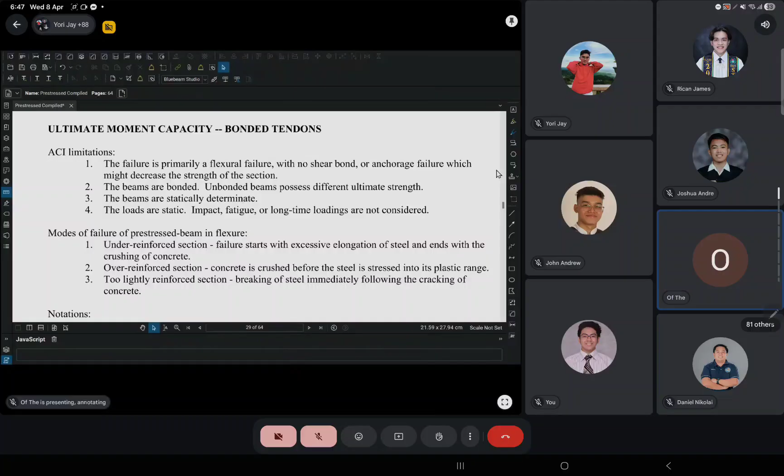Then third, you have also a too lightly reinforced section, when you have a very small amount of steel, where the strength of the steel is equal to the tensile strength of concrete or even lower. Then once the concrete cracks on the tension side, it will also be followed by the breaking of steel. So these three are the possible modes of failure.

Now in the subsequent formulas, these are the notations we will use. Just remember that when we have subscript P, it refers to the pre-stressing reinforcement. For simplicity, omega without the prime refers to the mild steel reinforcement, and with the prime symbol, it refers to the compression reinforcement. So for example, rho sub P is the steel ratio for pre-stress reinforcement, rho is the steel ratio for mild steel reinforcement, and rho prime is the steel ratio for mild compression reinforcement.

Similarly, you have your effective depth D, D prime, and D sub P, then area of the reinforcement APS, AS, and AS prime. Then for the strength of steel, you have FPS, which is the steel stress at ultimate moment capacity, computed using some empirical formula. And FPU, this is taken from the material property, the ultimate strength of the pre-stress reinforcement.

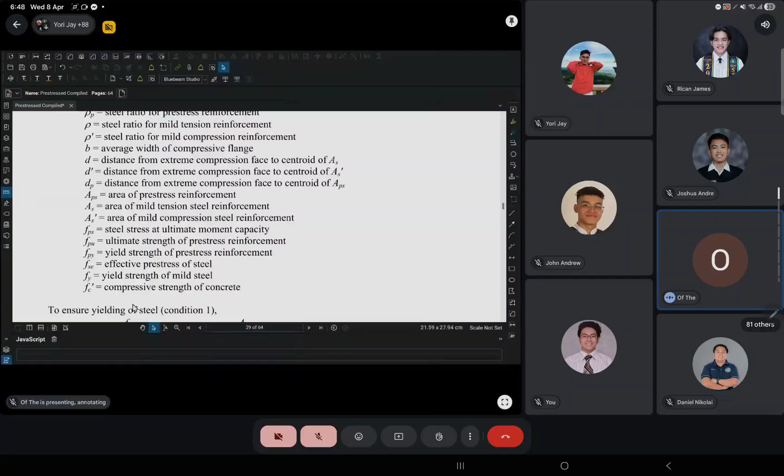Different types of cable are specified with different ultimate strength. Then FPY, that is the yield strength of the pre-stress reinforcement, then FSE, effective pre-stress of steel, and for mild steel, you have Fy. Then for concrete, you have F sub C prime. Now, between the three possible modes of failure, which one applies here?

Under-reinforced, over-reinforced, and too lightly reinforced - our preferred mode of failure is under-reinforced. So we want that if the section will fail, the failure should be initiated by elongation of steel rather than by crushing of concrete.

This is because crushing of concrete is a sudden, brittle kind of failure, whereas steel fails by yielding. It will exhibit excessive elongation first, resulting in widening and propagation of cracks toward the neutral axis, accompanied by increasingly large deflection, which gives a warning of impending collapse. Unlike failure due to crushing concrete, which is sudden with no warning.

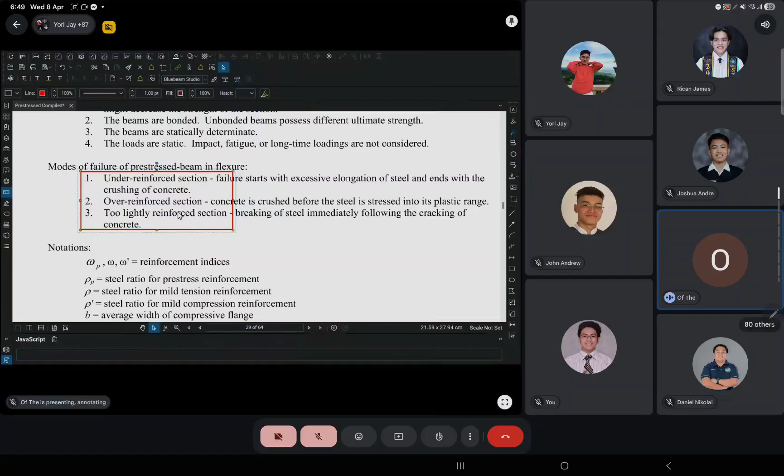That's why a well-designed or well-proportioned beam should be under-reinforced, not over-reinforced, and also not too lightly reinforced.

To ensure condition 1, that failure is initiated by yielding of steel, our reinforcement index omega P, which is equal to rho sub P times FPS over F sub C prime, should not exceed 0.36 beta 1. Where rho sub P is the steel reinforcement ratio for the pre-stress reinforcement, and beta 1 is a factor which depends on the strength of concrete.

If F sub C prime is less than or equal to 30 megapascal, beta 1 takes a constant value of 0.85. If greater than 30 megapascal, we have a straight line equation: 0.85 minus a reduction of 0.008 times the quantity F sub C prime minus 30, which represents the excess of the concrete strength beyond 30 megapascal. But in no case will beta 1 be less than 0.65.

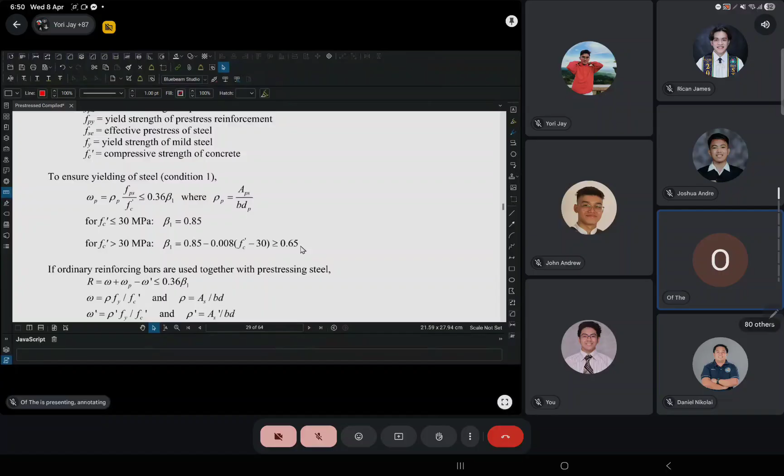Now, if ordinary reinforcing bars are used together with pre-stressing steel, for example you have your section, with the pre-stressing reinforcement here.

Oops. How will we pick this up? Okay.

In addition to that, usually we have mild steel bars placed at the corner in order to hold the stirrups in place, and also sometimes intentionally to reinforce the beam for tension if the tensile stress will exceed the tensile strength of concrete. So one way to address the problem is to provide mild steel reinforcement.

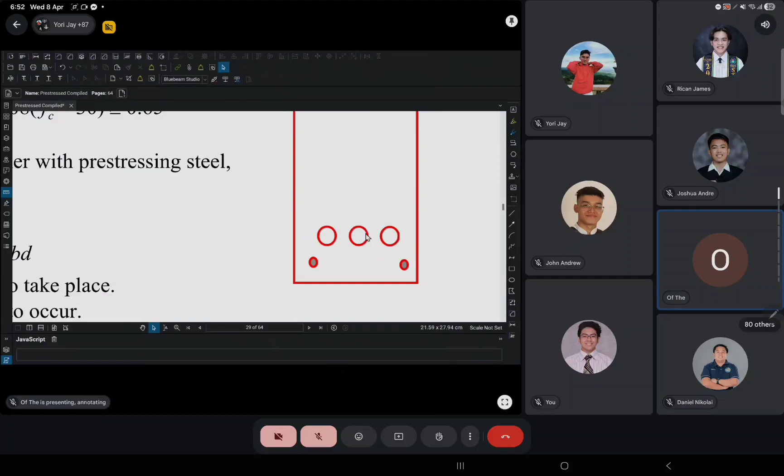And of course, we also have these compression bars here. They will serve to hold the stirrups in place, or again it could be intentional, that we add mild steel reinforcement on the compression side if the compressive stress will exceed the allowable compressive stress in concrete.

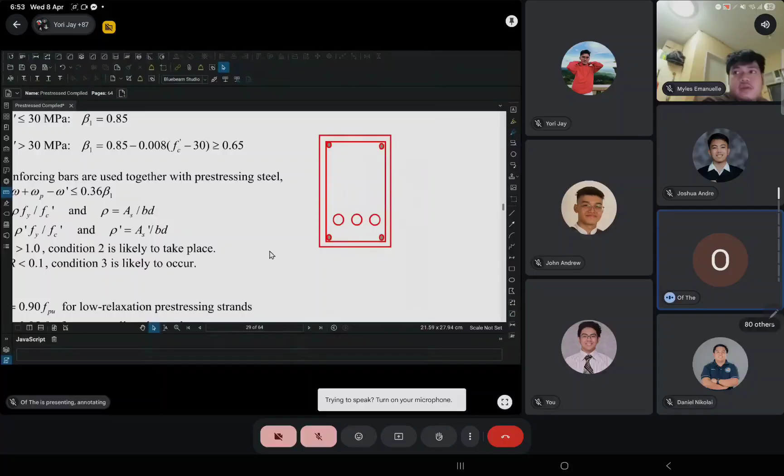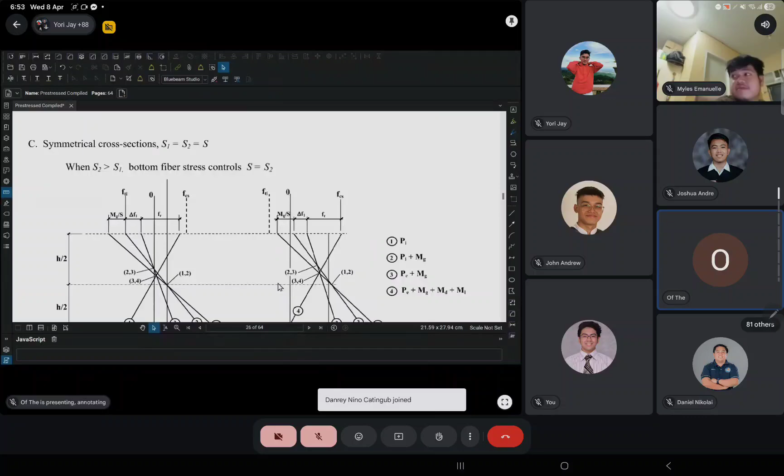So usually the procedure in designing these pre-stressed concrete beams is: first we proportion it based on service load condition as described, the procedure described in this chapter. Then once we have the initial size and reinforcement, calculated based on service load condition, we just check its ultimate moment capacity.

So if it's lacking on the tension side, we just add mild steel reinforcement rather than revise the size of the beam or the amount of pre-stressing reinforcement. This is usually what's done - we just add mild steel reinforcement.

So if these mild steel reinforcing bars are present, our reinforcement index will be modified. To omega sub P, we add omega, which is for the tension bars, then minus omega prime for the compression bars. So instead of simply omega P not exceeding 0.36 beta 1, omega P is added with omega or subtracted by omega prime. Then the sum should not exceed 0.36 beta 1.

So our omega is rho Fy over F sub C prime, omega prime is rho prime Fy over F sub C prime, where rho and rho prime are the steel reinforcement ratios for mild steel tension or compression reinforcement respectively.

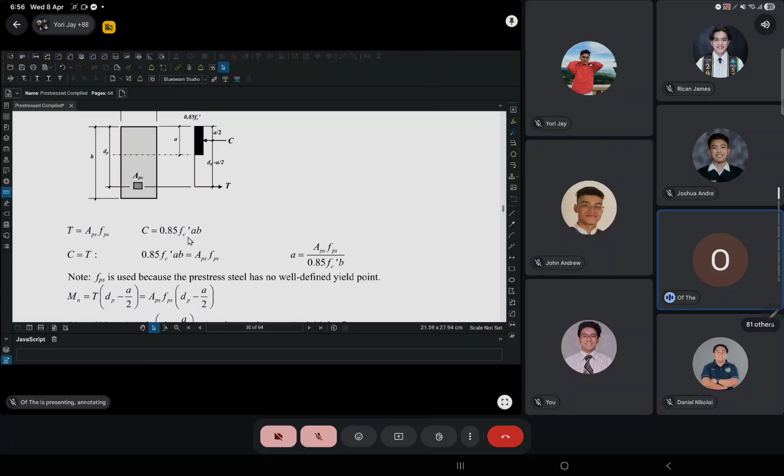So the total tensile force is equal to APS multiplied by FPS. Then the total compressive force will be the average concrete strength, 0.85 F sub C prime, multiplied by the area over which the stress block will act, which is equal to B multiplied by A. Then internal equilibrium requires that C will be equal to T. So if we equate and solve this equation for A, we get this result.

So there's a note here. FPS is used because pre-stressing steel, unlike mild steel reinforcement which has a well-defined yield point, pre-stressing steel does not have a well-defined yield point. That is why FPS is computed using some empirical formulas.

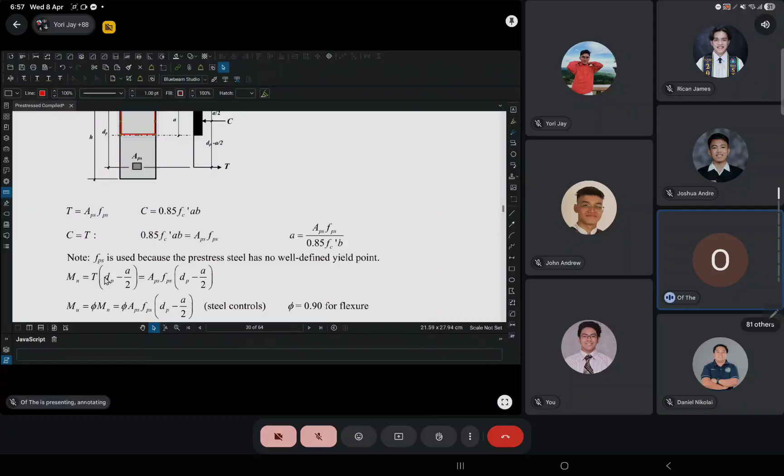So once we have computed the depth of the stress block, then we can determine the moment arm of the internal couple, which would be dP minus A over 2, and we can compute the internal moment. Since we know the force, either T or C, multiplied by the internal moment arm, dP minus A over 2, that will give you your moment capacity.

So if this is under-reinforced, then the moment capacity will be governed by the allowable tension in steel. So the problem now is how do we compute this FPS.

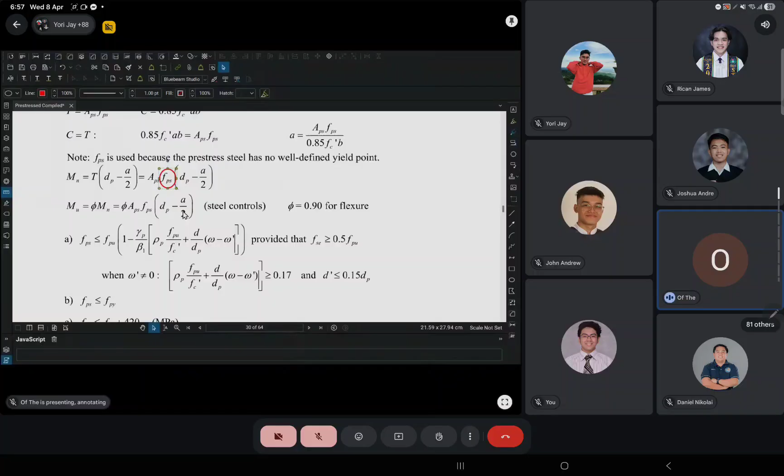So the code gives us 3 formulas for computing FPS. This is for bonded tendons. So we have the first formula, which includes a lot of factors here. Then second, FPS not to exceed FPY, and FPS not to exceed the effective pre-stress plus 420. And this is empirical, so your stresses here should be in megapascal.

And in this formula, gamma sub P is a factor for the type of pre-stress tendon. So if FPY, the ratio FPY over FPU, exceeds 0.8, you have a value of 0.55 for gamma P. And if greater than 0.85, it decreases to 0.4. And if greater than 0.9, it decreases further to 0.28.

Now in an over-reinforced bonded beam, the moment capacity is governed by the strength of concrete. So that's why here, instead of using T, we use C.

So the same, we still consider the internal equilibrium. We equate, then solve for the depth of the stress block, then replace APS by rho sub P BDP, then cancel out the common terms. So you will get this reduced expression for A, which is 0.424 beta 1 times dP. So once you have solved for A, then you can compute the internal resisting moment capacity.

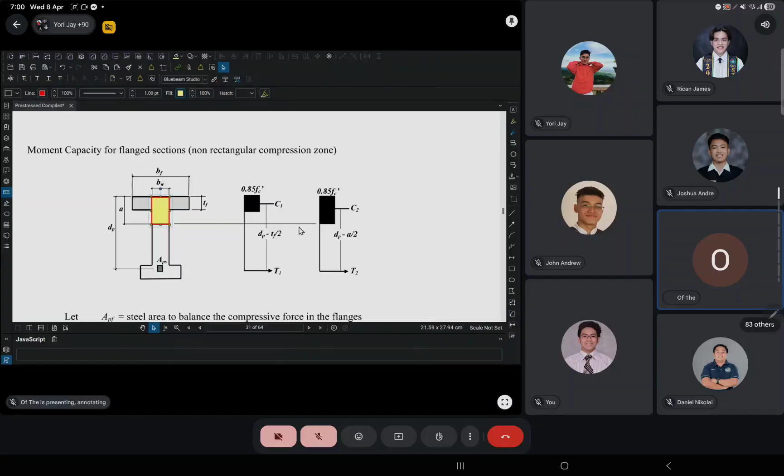So to analyze this, we just divide this area into component rectangles. So the middle part, that is one internal couple. Then for the concrete corresponding to the flanges, that is another internal couple. So we are using here superposition. Then of course the total moment capacity will simply be the sum of this couple and this internal couple.

So it's just the same as a T-beam analysis in reinforced concrete. So again, you are already familiar, it follows the same line of analysis. So starting with this couple here.

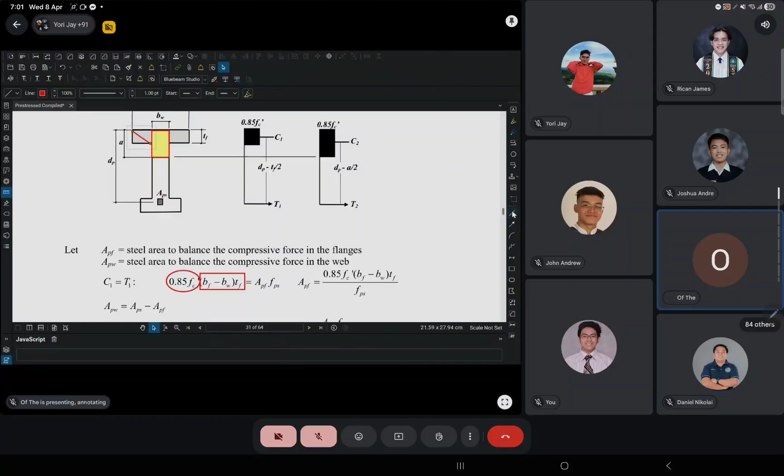So again, equilibrium requires that C1 is equal to T1, and C1 will be equal to the average concrete strength or stress, 0.85 F sub C prime, multiplied by the area. So the area will be this area at the side, this area here, also at the other side. So the net width will be BF minus BW, flange width minus the width of the web, then multiplied by the thickness of the flange.

And that is equal to the area of steel that is required to balance the compressive force C1. So we call that APF, where the subscript F refers to the flange, compression force in the flange. So the corresponding area of steel to balance it, we call APF, multiplied by FPS. So from this equation we can solve for APF.

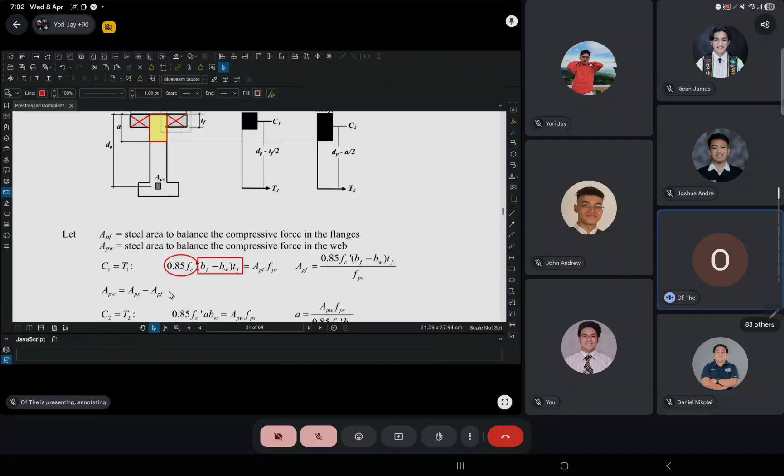So nakuha nato ang APF diri, so pila may mahibilin para sa kaning nga couple. So it will be APS, the total area of pre-stress reinforcement, minus the area used up in this couple here. So muna ang APW, so this is for the web, to balance the compressive force in the web.

So kaning middle portion, atong equate ang C2 to T2. So C2 will be 0.85 F sub C prime ABW and T2 APW FPS. Then solving for A, we get this value.

So once we have solved for the depth of the stress block, before you can compute the moment, you have to know the value of A. So this is how we arrive at the value of A. So once that is known, then we can now evaluate the moment of this couple here and this couple.

So for the first part, you have the compressive force is this value, 0.85 F sub C prime BF minus BW TF. Then the moment arm will be dP minus TF over 2. Then for the second couple, so ang atong

Force will be APW FPS. So solving it in terms of the tensile stress in steel, so APW FPS. So diri pwede sad nga mo-ingon APF times FPS, instead of this. Anyway, based from this equation, they are equal.

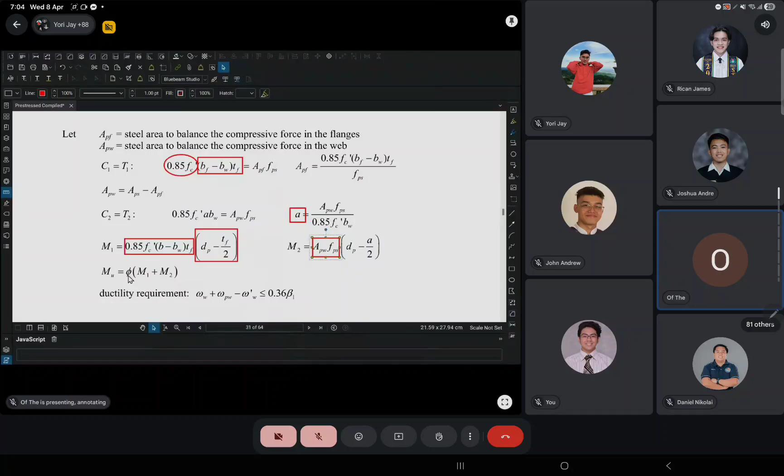And the ultimate moment capacity will be equal to the sum of these nominal capacities then multiplied by the strength reduction factor, phi. So for bending, phi is equal to 0.9.

So ang ductility requirement, we have omega sub W. So kaning subscript na W, nagpasabot nga kay mag-compute kag rho, mag-compute kag rho mo. So, ngari, atay calculation sa rho, di ba?

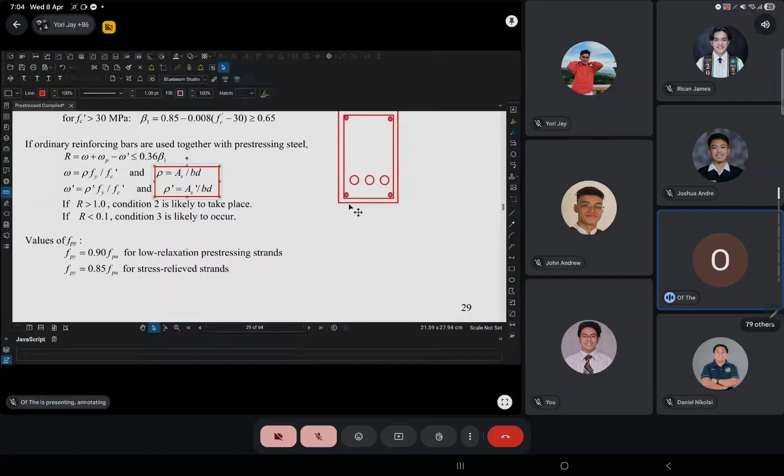But in case of an irregular section or non-rectangular section, kung unsa nga B ang imong gamiton, ang B is sa flange ba o ang B sa web? So, the subscript W will serve to remind us that we use BW, the width of the web, and not the width of the flange. So kani siya nga mga index is computed based on BW.

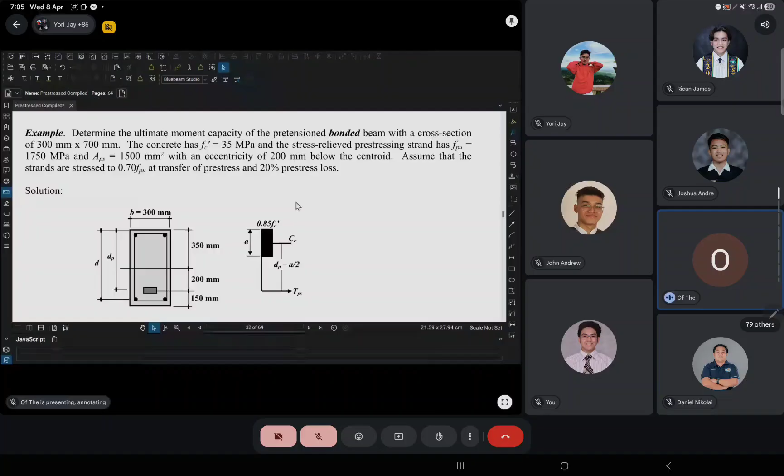So what follows is a sample problem. Determine the ultimate moment capacity of a pre-tensioned bonded beam with a cross-section of 300 by 700. Concrete has strength of 35 megapascal and stress relieved pre-stressing strand has a FPU of 1750 megapascal, APS 1500, and eccentricity of 200 mm below the centroid. So assume that strands are stressed to 0.7 FPU, at transfer of pre-stress and 20% pre-stress loss.

So monitoring atong cross-section, sa atong pag-una nga computation nga gihimo niini, so probably the section was already proportioned based on service load condition. And we are now checking sa iyang ultimate moment capacity.

So at this stage sa atong computation, naa na tay beam dimension, naa na tay area sa atong pre-stress reinforcement, unya nahibaw-an na ang iyang eccentricity. Okay?

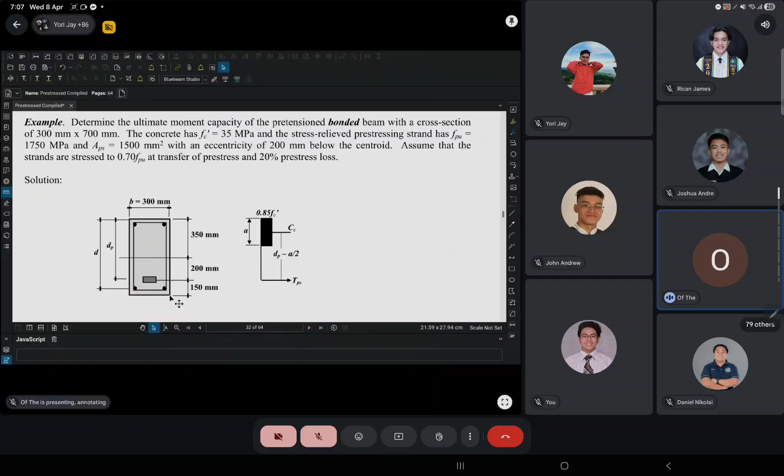So kining solution, although as you can see in the figure nga naay mild steel nga compression bars, kanito rin nay mild steel nga tension bars. But in our calculation, we neglect the effect of the mild steel reinforcement. So wala na siya mo-enter diri sa atong computation.

Now, in case if the beam is intentionally reinforced with mild steel reinforcement to increase the ultimate moment capacity, so kung i-consider nimo ang effect or contribution sa compression bar, then you will have here the compressive force taken up by the bars on the compression side, in addition to this one, sa atong tension diri or tensile force sa imong mild steel reinforcement.

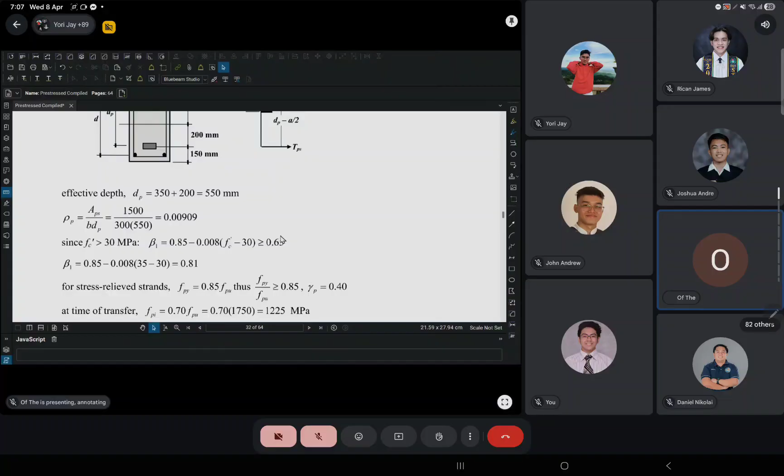However, in this calculation, we did not consider the effect sa compression or tension reinforcement. So from the figure, bitbit-on na atong figure, so the effective depth, that is the distance from the extreme compression fiber to the centroid of the reinforcement, that would be the sum 350 plus 200, which gives 550.

And next we solve for rho sub P, which is APS divided by BDP. So naa tay APS, naa tay B, naa tay DP. So masolve na ang rho P.

Then next we compute beta, or beta sub 1. So since our F sub C prime is greater than 30, then we use this formula. If less than or equal to 30, then it is automatically 0.85. So substituting F sub C prime 35 megapascal, we get beta 1 of 0.81.

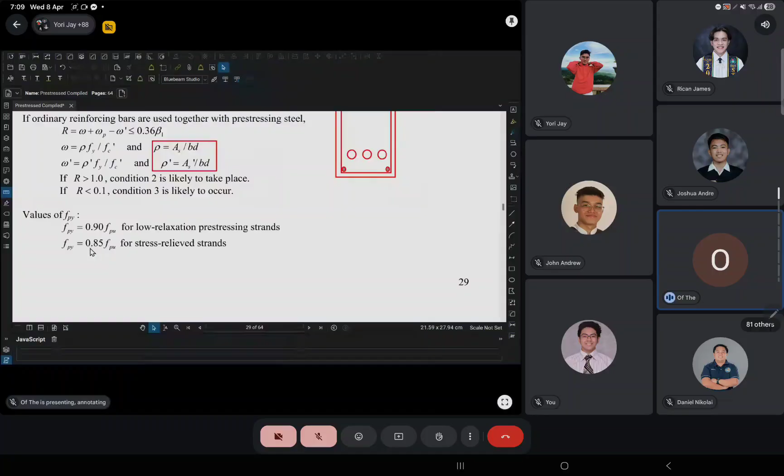Then next we compute FPY, which is for stress relieved strands. So gikan diri nga table, ganito, for using this formula, stress relieved strands, our FPY is 0.85 FPU. And if you get the ratio, so it will be, you will get an equivalent value for gamma sub P equal to 0.4. So mao na siya diri ang atong gibasihan.

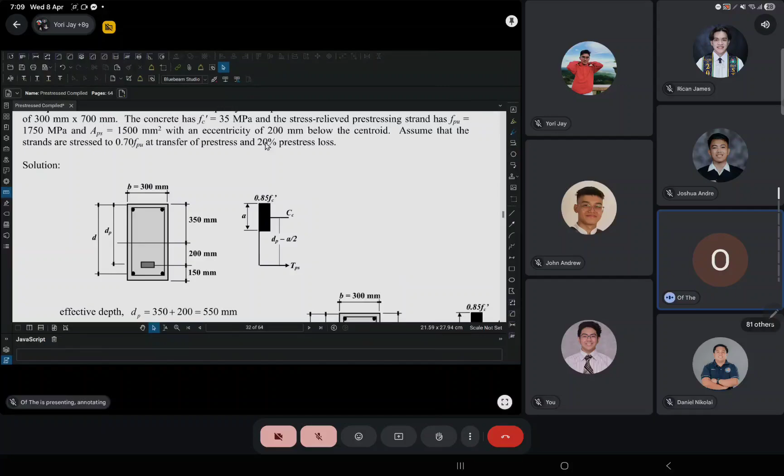So gamma P equals 0.4, and the time transfer FPI is 0.7 of FPU. Based on this condition, the strands are stressed to 0.7 FPU at transfer of pre-stress. Then FSE, considering a 20% pre-stress loss assumed in the problem, gives us an effective pre-stress of 980 megapascal.

So the next part will be to determine FPS using three equations, A, B, and C. First, we have to verify this specified condition.

We need to verify this because the formula is valid subject to this condition. Before applying the formula, we check if FSE is greater than or equal to 0.5 FPU. Our FSE is 980, and half of FPU is 875. So the condition is true, and therefore this formula will apply.

Now, neglecting the effect of the tension or compression mild steel reinforcement, we set those to zero. The remaining term cancels out, leaving only one term. Substituting values, we arrive at FPS equals 1357 megapascal.

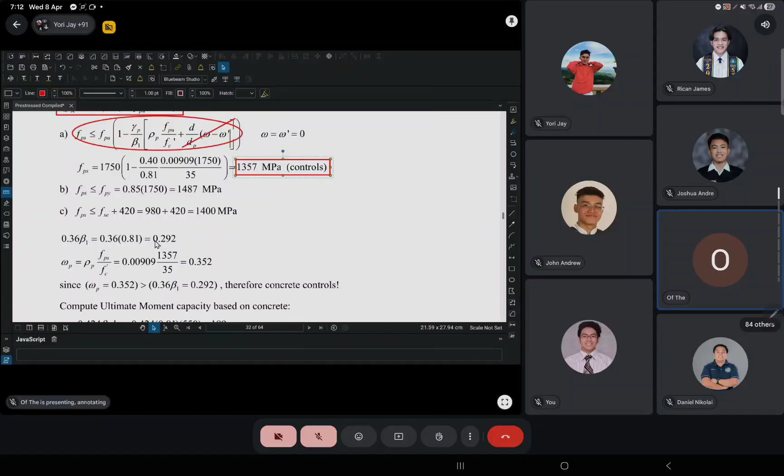Next we check whether tension or compression will govern. Our limit is 0.36 beta 1, which gives 0.292, and we compute omega p using the formula rho sub p times fps over f sub c prime. These values are given. Then rho sub p is computed as 0.00909, and we get omega p equals 0.352. We compare this omega sub p to 0.36 beta 1.

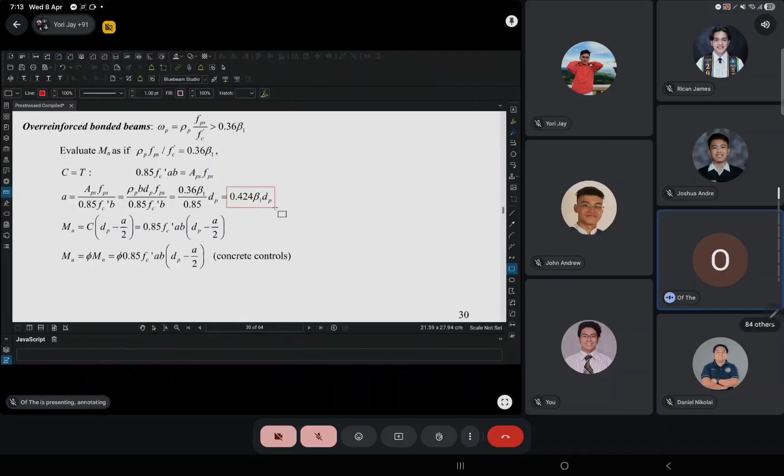So once you have A, you can compute your moment capacity, expressed in terms of the compressive force C: 0.85 F sub C prime, with A computed, B given, then dP computed based on the section dimension. So we compute MU. Substituting values, you get 691.5 kilonewton meter.

Up to this part, the solution is already complete, since we know this condition is prevailing, so concrete will govern. But just to verify, let's also compute the ultimate moment capacity based on steel.

So we compute the depth of the stress block if that is the case, by equating the compressive force to the tensile force. Full tension in steel, APS times FPS, equals the balancing compressive force in concrete, which adjusts this A. So A is computed and we get 228.

Then we use the equation APS FPS, that is T, times the moment arm, the internal couple, multiplied by the capacity reduction factor. Substituting values, we get an answer of 798.73 kilonewton meter, which when compared with the previously obtained result of 691, the lower value governs the moment capacity, since steel is larger than this value, as we should expect.

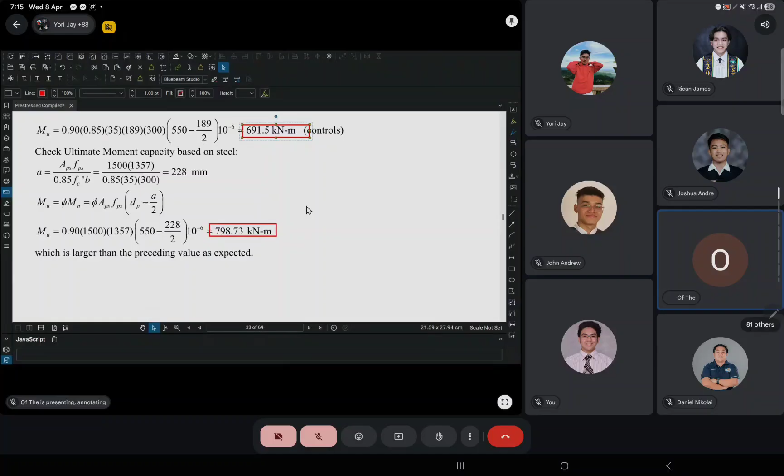So that's for the bonded tendon. Now we move to unbonded tendon. For unbonded tendon, the pre-stressing force is transferred at the end of the beam through bearing plates, since there is no bond stress between the reinforcement and the concrete. The pre-stressing force is transferred only at the ends of the cable, using bearing plates.

For unbonded tendon, the ultimate strengths are actually lower than for the equivalent bonded ones, and there are two reasons given here. First, the tendon is free to slip, so the strain in the tendon is more or less equalized along its length, and the strain at the critical section is lessened. Unlike in the bonded case, where the strain in the tendon corresponds to the magnitude of the bending moment, so at the section of larger bending moment, you have a larger strain.

But in unbonded tendons, they are free to slip since they are not gripped by the concrete, so the strain is distributed throughout the length of the cable.

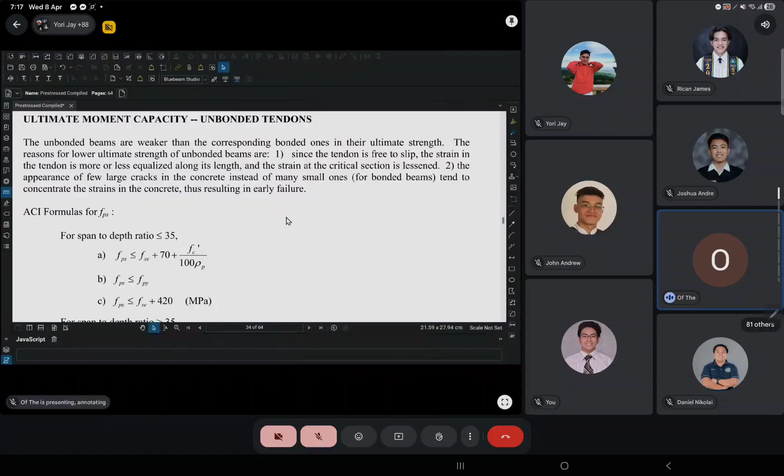Then second, the appearance of few large cracks in the concrete instead of many small ones for bonded beams. This tends to concentrate the strain in the concrete, thus resulting in early failure. That is why for unbonded tendons, to avoid this situation, the code requires that we provide a minimum amount of bonded reinforcement, to avoid the occurrence of large cracks.

In terms of calculation, the difference here is in computing FPS. For bonded tendons we have the formulas for FPS, and for unbonded, we have a separate set of formulas. FPS depends on the span to depth ratio. If it is less than or equal to 35, we use this set of equations. If greater than 35, we use another set of equations. So to determine which set to use, we have to verify the range of our span to depth ratio.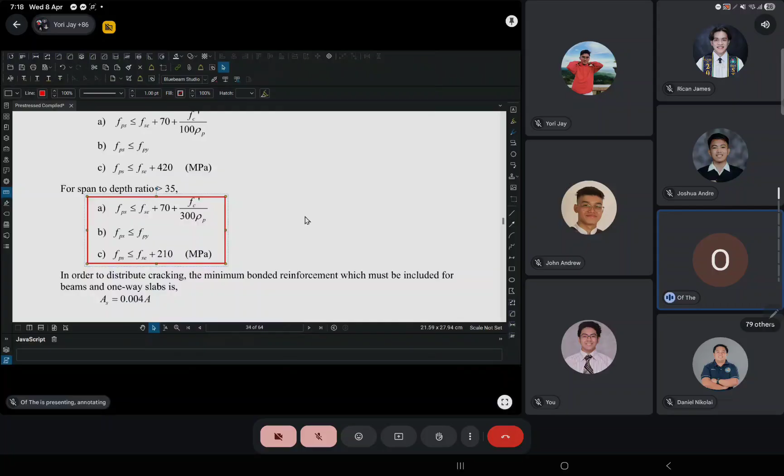So in order to distribute cracking, the minimum bonded reinforcement which must be included for beams and one-way slabs is 0.004 of A. Now that A is the area in tension. For example, for this cross-section, if it is rectangular, then our neutral axis will fall at mid-depth, unless you follow a more detailed calculation.

Because there is a reduction in concrete area here, since this is where you place your prestressing reinforcement, and that will somewhat reduce the concrete area here and therefore move the neutral axis towards the top, or higher. But anyway, neglecting that, our tension area is this area here—that is the A.

So the area of that part of the cross-section between the flexural tension face. In case of positive bending moment, your flexural tension face will be at the bottom, and the centroid of the cross-section—so the steel which supplies AS should have a yield stress not exceeding 414 megapascals.

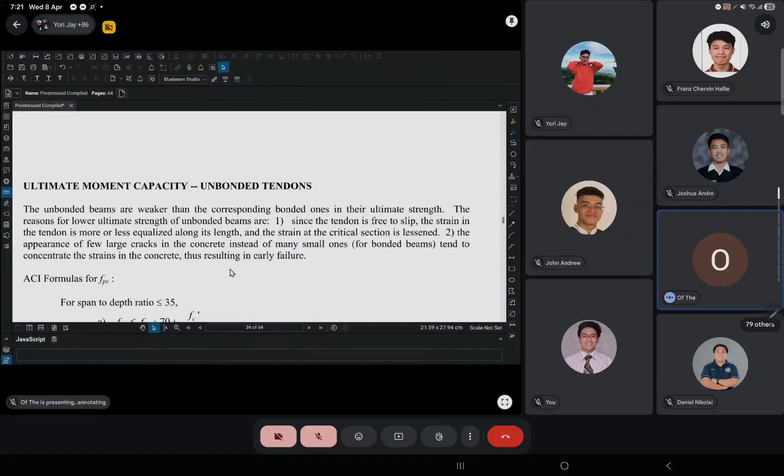So for dp, here we have the span to depth ratio. The span is 12 meters divided by the depth, which is the overall depth of the section—so 700. We get 17.1, which is less than 35. So since it's less than 35, this set of equations for solving FPS will be applied.

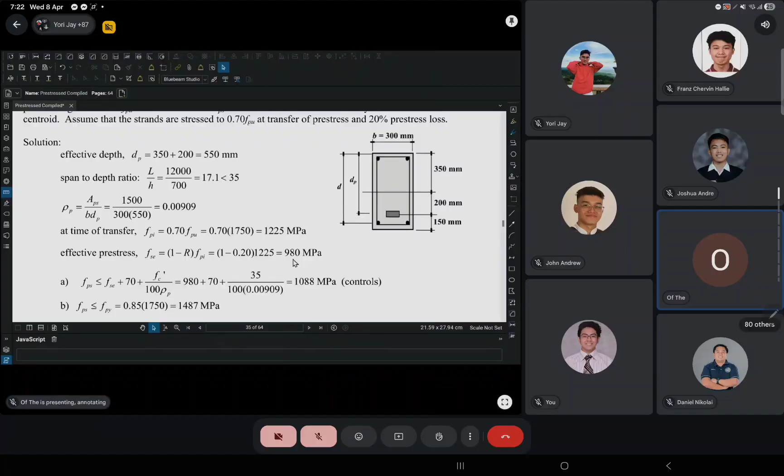So next, we solve for rho sub P, similar to before. Then at time of transfer, 0.7 FPU gives effective prestress of 980. Now for our equations, we use these three. Substituting the values, we get these results, and we adopt the smallest of the three answers. In this case, we have 1088 megapascals.

Then for minimum bonded reinforcement, we have 0.004 of A, where A is the area between the neutral axis and the tension face, which is effectively half of the cross-sectional area of the beam. So we get a required area of 420.

Then we select the bar diameter and compute the area of the bar and the number of bars. So we got 2.1, we round off to 3 pieces of 16 mm diameter bars.

Then for the limiting value, whether it is under-reinforced or over-reinforced, we compute 0.36 beta 1, where beta 1 is 0.81, the same as we calculated in the previous sample. So we get 0.292. Then we compute the reinforcement index for the prestress reinforcement.

Then this is now for the mild steel reinforcement. In this analysis, we are considering the mild steel reinforcement—the contribution of the mild steel reinforcement. Now, effective depth for the mild steel reinforcement.

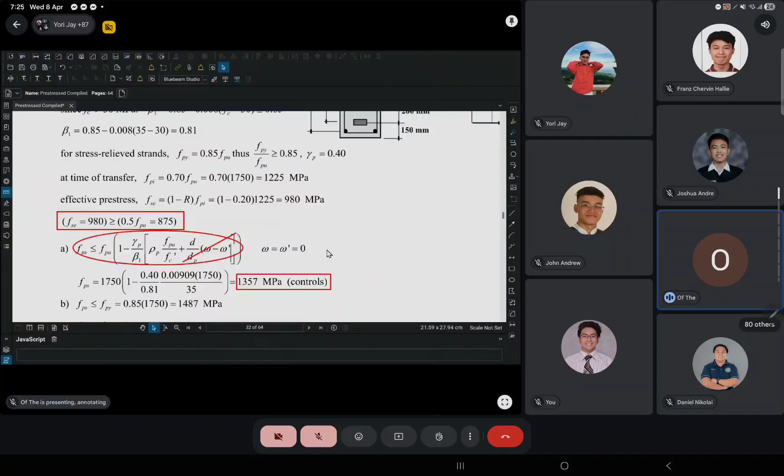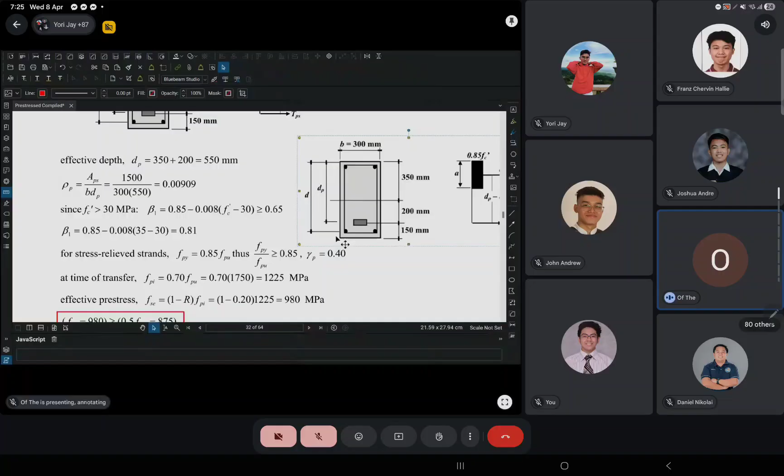Now, in this example, so both in the previous example and sa kaning example karon, ang concrete mo may govern sa iyang moment capacity, which again from a design standpoint is not desirable. So ang ato gyud untang buhaton sa actual nga design kay ang steel mo may govern sa strength. Atong pwede dungangan atong compression bars, no, to reinforce. We provide enough nga compression steel so that the failure will now be initiated by yielding on the tension side. Pero dire wa na ta mo padayon diha, kay ang atong tuyo pag-compute naman sa moment capacity. Pero mag-design ta sa actual design practice, ato na siyang i-address nga problem. Kaya dili ta gusto nga mo fail ang atong beam first by compression nga failure.

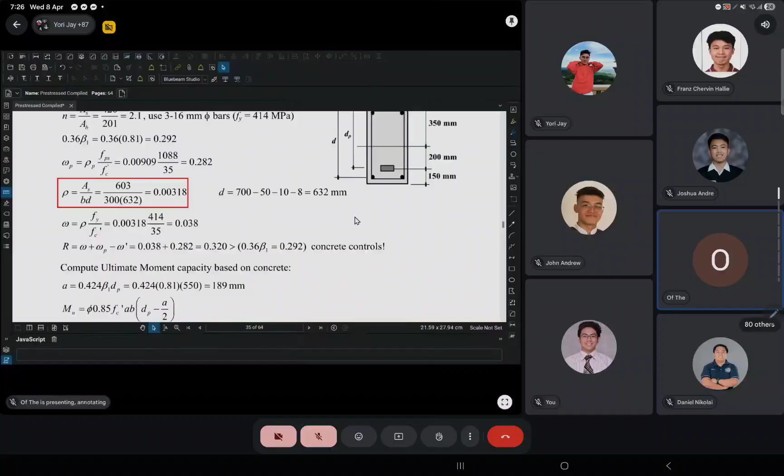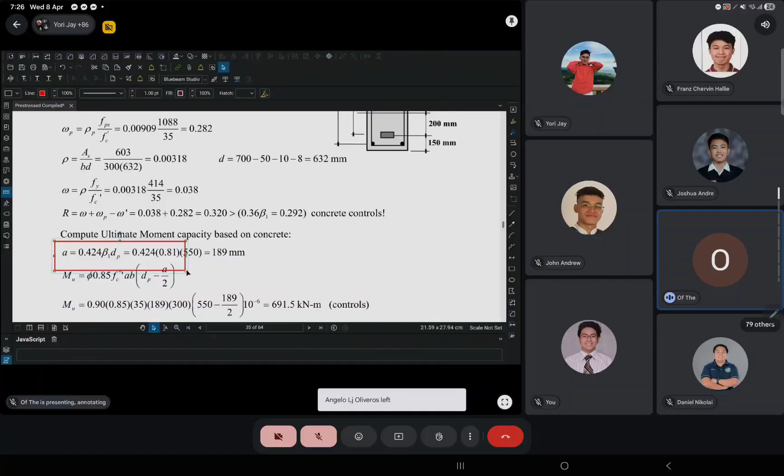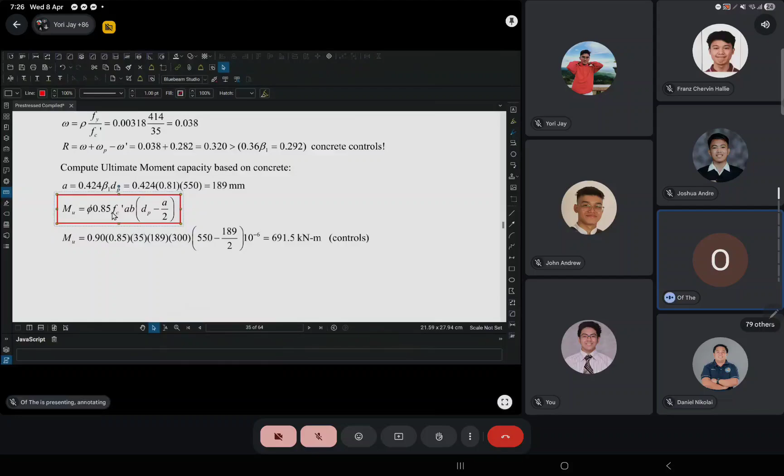Okay, so if compression control, so you have this formula for determining the depth of the compression block, then MU is computed based on the concrete strength. So 0.85 fc prime AB, that is the compressive force, kani siya. Then dP minus A over 2, the moment arm, then phi the reduction factor. So if you substitute the values, you get an answer of 691.5 kilonewton meter.

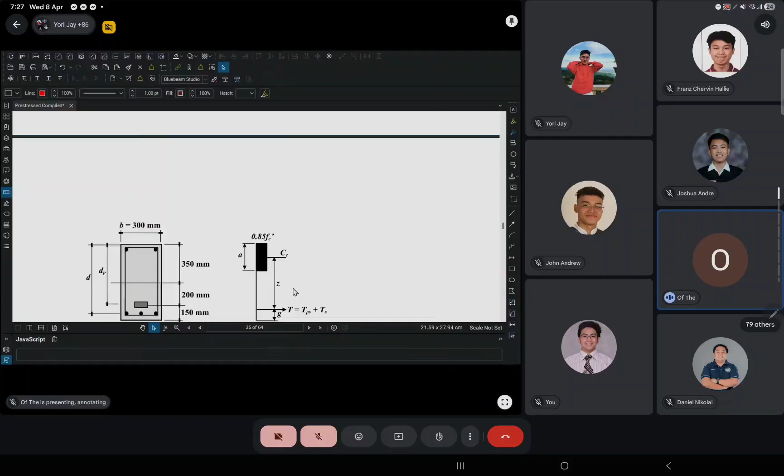Now, so again, up to this part, the solution is already complete, since this condition prevails, kani siya, and we are sure that the moment capacity is governed by concrete. But still, pareha sa ganiha, ni padayon lang gyapon tag compute. Ato lang gi-check ang moment capacity based on steel.

So karon ang atong sa steel nga side, naanay siya duha ka component. Naatay pre-stress reinforcement nya tulo ka 16 mm diameter bar. So unsa may atong buhaton ini, ato lang ni siyang gi-replace, nakay tension diri sa imong pre-stress reinforcement, nasa kay tension sa imong mild steel reinforcement. Then we replace that by a single or by the resultant, kaning T, which is a sum of TPS plus TS.

So TPS will be FPS times APS, then TS is FY times AS. So again, remember nga natay subscript nga P to denote sa atong pre-stressing steel. So we get these answers, then we take the sum, then locate the centroid. So mo man siyang resultant ining duha ka mga forces. So ato na compute ang magnitude, karon atong solbuhan asa man ang iyang location.

So we locate it from the bottom. So you have kani nga force ato na compute nga 1632. Then kaning sunod, kaning TS ato na compute nga 250. So pila may distance na to from the bottom to, so pila man nga distance? Yeah, so that would be 50 the concrete cover plus 10 mm stirrup diameter plus half bar diameter. So 50 plus 10 plus 8, that would be 68.

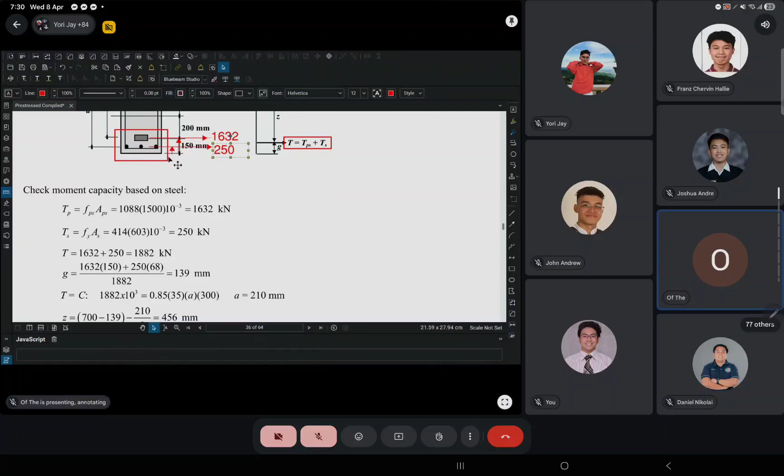So manini ang sunod na tong kuan, ang pag-compute na to sa depth sa atong compression block, assuming that steel will reach their corresponding limits. So ato na equate ang total nga tensile force ngadto sa total nga compressive force. So 1882, then 0.85 f'c a b.

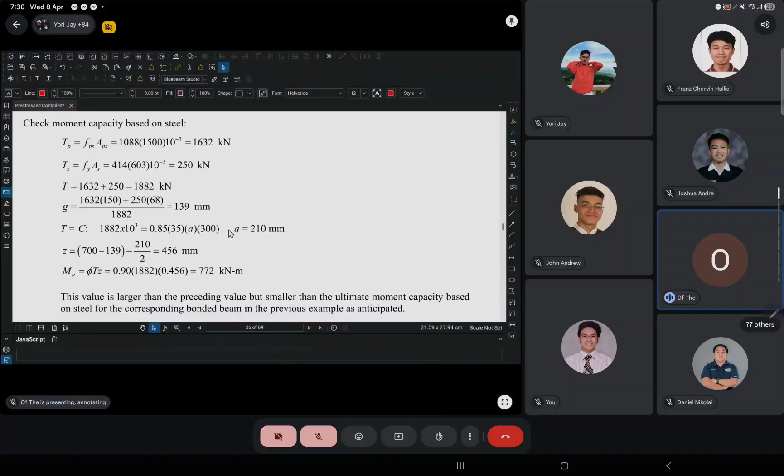So ang anong diri ang area. So once we have solved for A, then we can compute the kining moment arm internal couple, which is Z. So Z will be dP minus A over 2. Ano? Rather, Z will be equal to H minus G minus A over 2. Okay? Another ang atong computation.

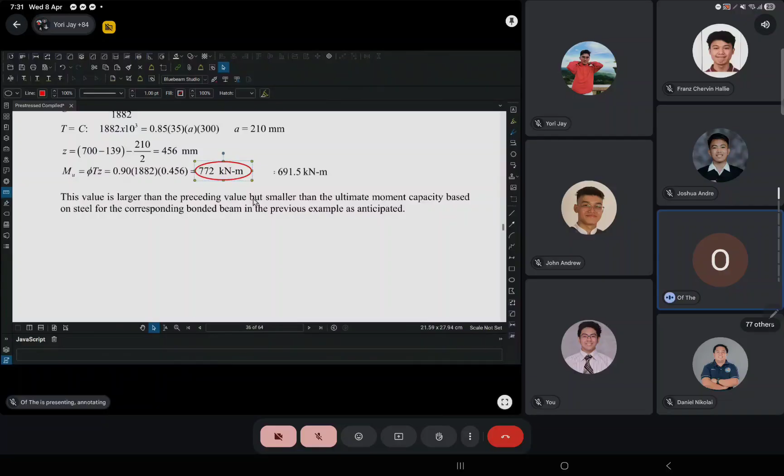Then once that moment arm is determined, then you can compute the internal resisting moment, in terms of the tensile force, so T times the moment arm Z, then multiplied by the capacity reduction factor. So we get 772. Then if we compare that with this answer, which is 691, so as expected, the capacity based on steel strength is larger compared to that of moment or concrete strength, because this condition prevails.

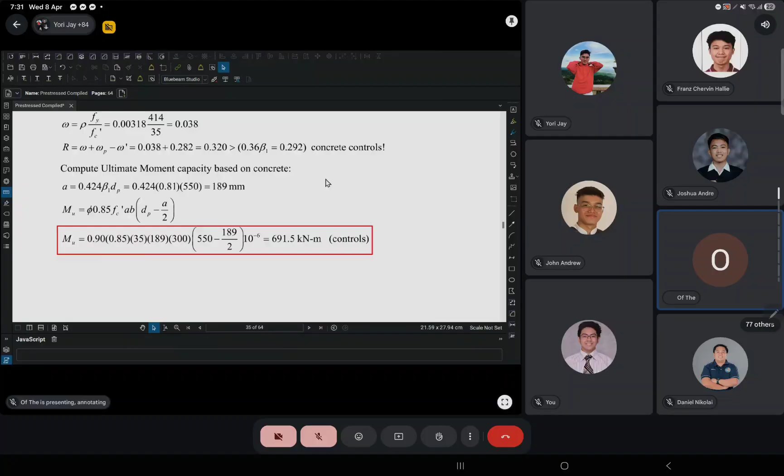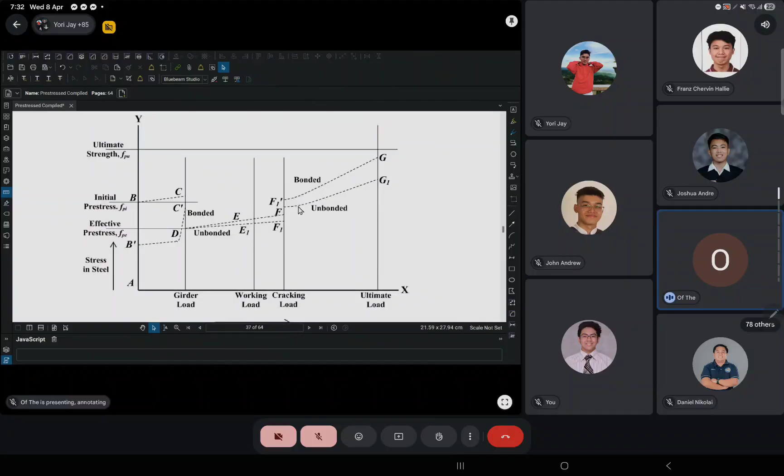This graph shows the variation of stress in the steel, both for bonded and unbonded beams. Let's trace the path for the unbonded beam first, as the load is progressively increased, from girder self-weight, then superimposed dead and live load, then the cracking load, which is the load that will initiate cracks on the tension side, then finally the ultimate load.

So as the load on the beam is increased, the stresses still increase. This shows the variation for the unbonded beam, so it goes here, then there, then up to this point.

For the bonded beam, there is a slight decrease here, then it goes here, and at the cracking load it will abruptly absorb additional force, suddenly jumping. As you further increase the load, the stress increases further.

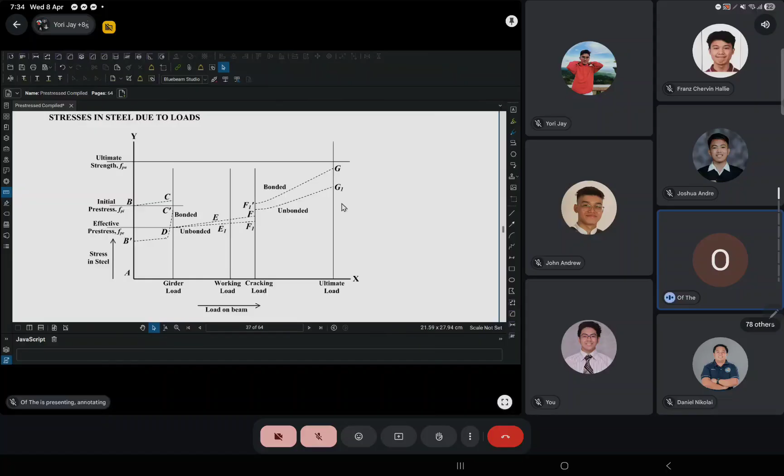So we can see that the bonded beam, because it carries a larger stress, will have a larger moment capacity. So, any questions?

So you already received the plates? These plate problems, numbers 4 to 7.

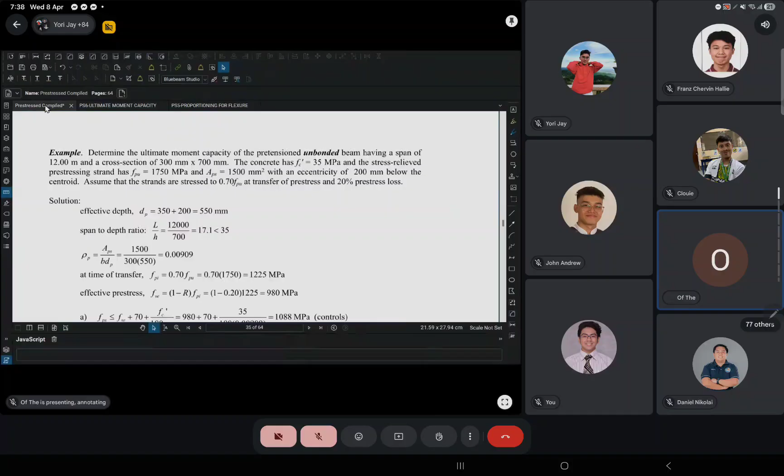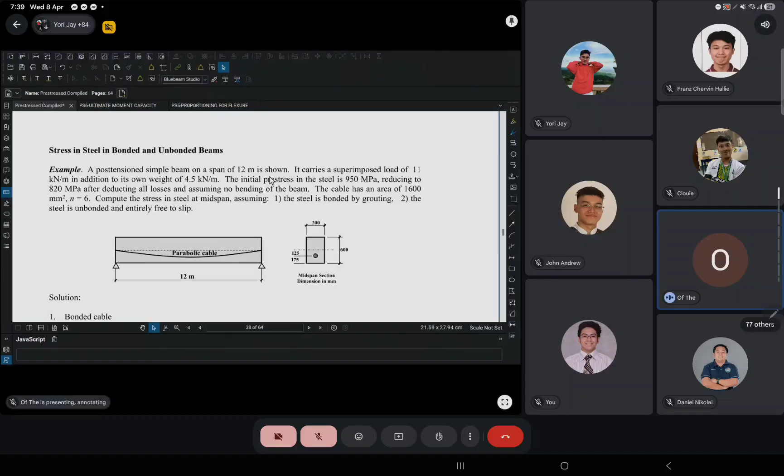Sometimes it is necessary or required to compute the stress in the steel. Although this is rare, there are occasions when it's needed, for example in investigation problems where loading is given and you want to determine the stress in the steel.

In this example, we'll illustrate the method of computation both for bonded and unbonded beams. Same beam, but in part 1 we assume the steel is bonded, then in part 2 we assume the steel is unbonded. A post-tensioned simple beam on a span of 12 meters is shown, carrying a superimposed load of 11 kilonewton per meter in addition to its own weight of 4.5 kilonewton per meter.

Later, when we arrive at the topic of prestress loss, when the prestressing force is applied, the beam will tend to bow up, tend to bend upward, thereby resulting in a loss of prestress, since the fiber at the level of the steel reinforcement will slightly contract due to compression. We neglect that effect here.

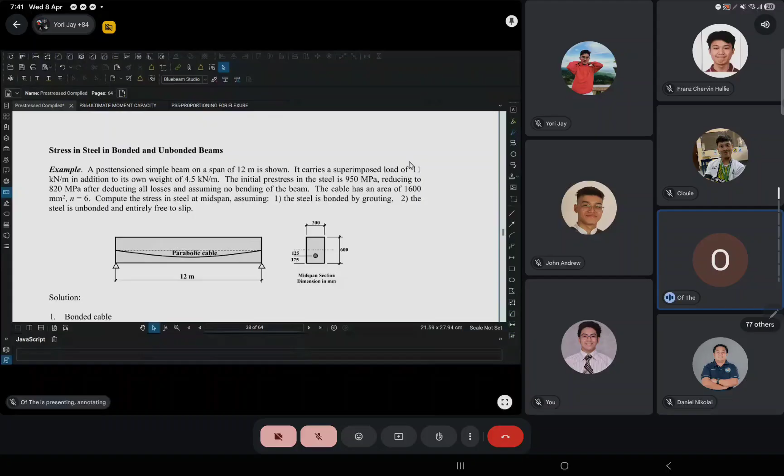Here we have the superimposed load of 11 and the weight of 4.5, so this combines the dead load and the superimposed load. Since it is simply supported, we use WL squared over 8, and we get 279 kilonewton-meter.

Then we calculate the moment at midspan due to prestress, which is APS times FSE multiplied by the eccentricity e.

APS is 1,600 square millimeter, FSE given to be 820, eccentricity from the figure is 125, then we multiply by 10 to the minus 6 to convert Newton-millimeter to kilonewton-meter.

Then we compute the net moment at midspan, which is the moment due to applied load minus the moment due to prestress.

Now, in this calculation, what concept of prestress are we using here? There are three, right? Homogeneous beam concept, internal force method, or load balancing.

So which one is this? What method is it? My fellow students, which one is this - homogeneous beam method, internal force method, or load balancing method?

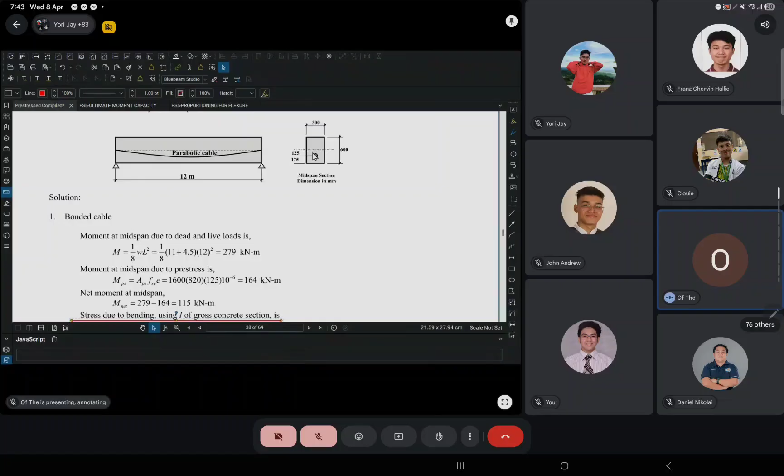Our M is 115, that net moment, and y is the distance from the neutral axis to the level of the steel reinforcement, which is 125. So this gives the stress in concrete, 2.66 megapascal.

Then the corresponding stress in steel, we multiply by the modular ratio N. So N times FC is 16, and this is the change in stress in the steel.

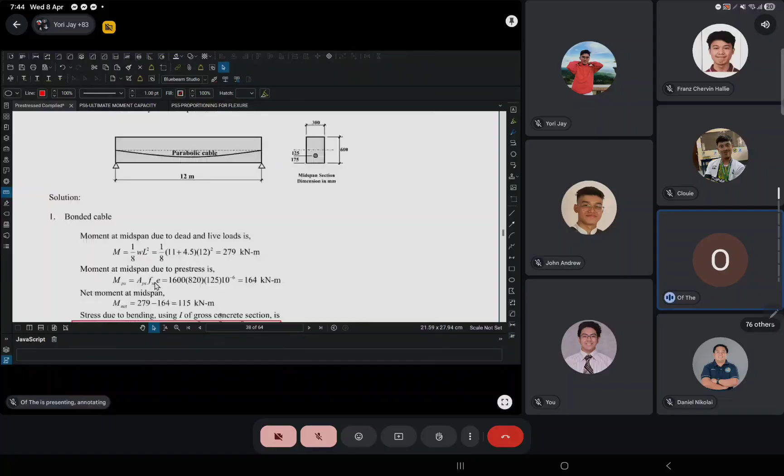Then we add it back to the effective prestress of 820 megapascal, giving us the final or resultant stress in the steel.

Now, in the second case for the unbonded cable, the solution requires integration. The average strain in the cable is computed by integrating the strain along the entire length, starting with the unit strain in concrete at any point.

This strain is given the symbol gamma. Don't be confused - this gamma represents strain.

Some textbooks use the symbol E for strain instead. So this strain is equal to the stress divided by the modulus of elasticity.

But stress by the flexure formula is My over I, so this My over I becomes our F.

So we get that result of My over E sub Ci, where our E is the modulus of elasticity of concrete.

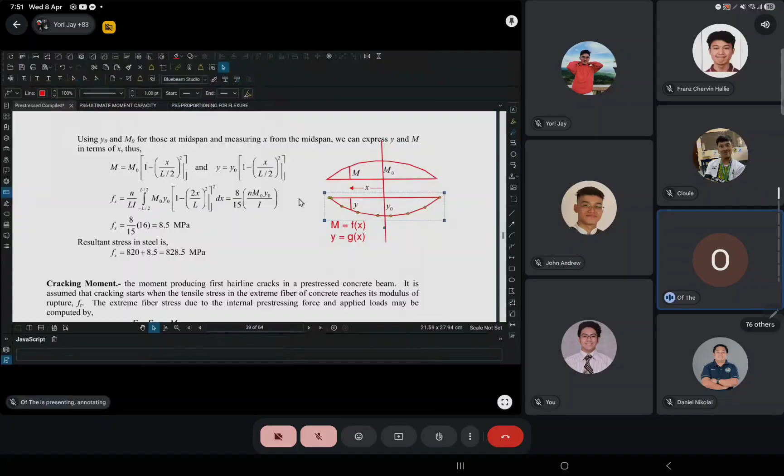Sa equation sa parabola, y is equal to kx squared, and you can easily derive this equation. What is true sa kaning moment equation, ang atong cable profile, parabolic man sad. So asa na sa similar nga kuha, forma, but instead of MO, you have YO ang na-derive.

So karon gikan ini nga result, so you have...

Okay, so kani siya. Ang inertia na to constant man mo na diri atong gipagawas, so mo na diri sa outside integral sign you have n over LI. Then what remains each side, which are both functions of x, ang m na to ang atong y. So kung atong i-replace ang m by any expression, ang y replaced by this expression, so naa kay mo yo.

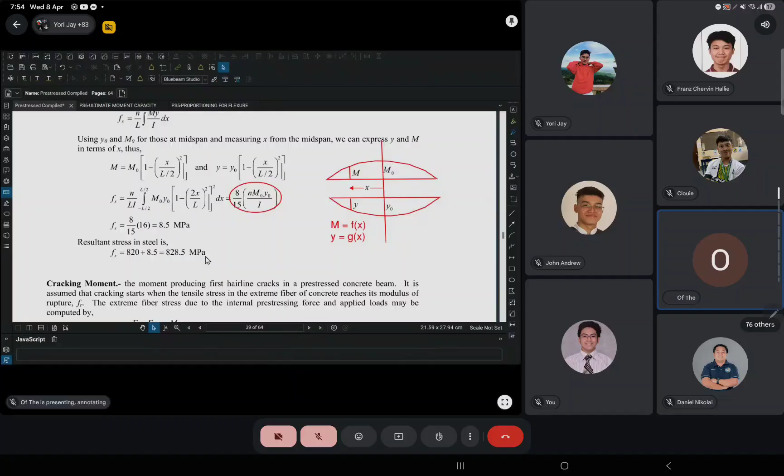Well, kani siyang sunod nga topic is just for solving the cracking moment. So it is the moment that will initiate the occurrence of the first tensile cracks, and that can easily be solved by use of the combined stress formula.

So the resultant stress will be the superposition of the stress caused by the eccentric nga pre-stressing force plus the stress due to the live load, or the applied load. Ya kani siyang sa stress due to eccentric nga pre-stressing force ato siyang duha ka term. Ning primero nga term is direct compression and the second term is due to the eccentricity of the pre-stressing force.

So, at cracking moment, ang atong M will be equal to MCR, which is the cracking moment. Ang atong F, which is the stress at the tension, extreme tension fiber, will be equal to the rupture strength of concrete, that is the limiting value. So kung kini siyang M atong alisdagan MCR, yung F replaced by FR, so we will come up with this equation.

And solving for MCR, we will come up with this equation.

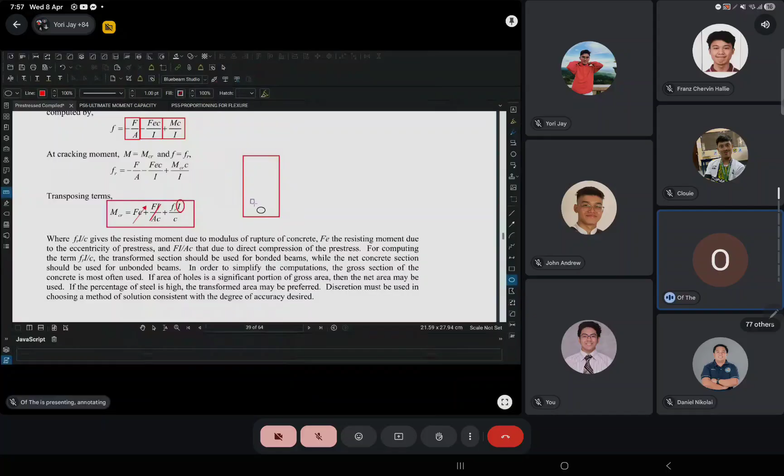So naay sa commentary ang pag unsa man nga ay nga atong gamiton, sa man nga ay. Kay ato mang na observe, nga mo ning atong beam nga cross section, then the actual concrete area is somewhat decreased due to the presence of the pre-stressing bars.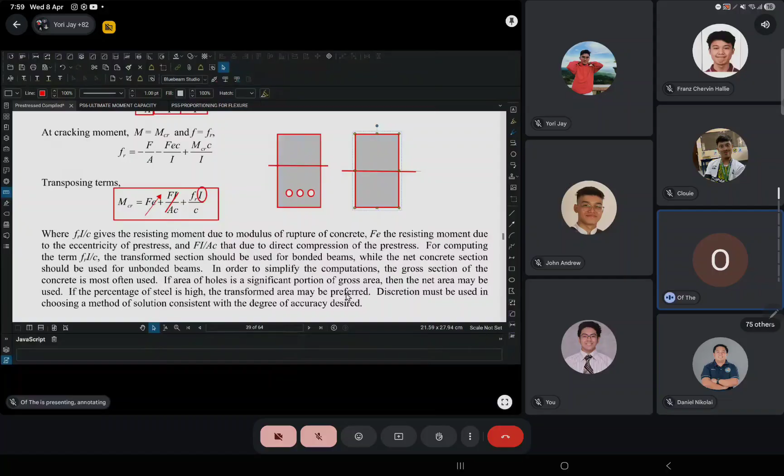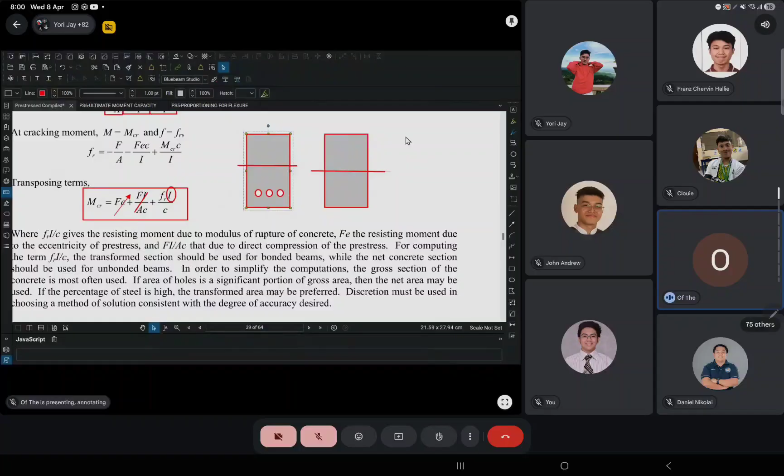So unsa ang gamito na to? Giingon diri nga discretion must be used in choosing a method of solution consistent to the degree of accuracy desired. So kani siya mo pinaka least nga accurate, ya kani siya nga maynusan nimo diri, ikatulo ang pinaka accurate katong i-transform nimo.

But usually kani siyang gross area, kay ug ato i-percentage gamay ra maning percentage area sa steel kumpara sa total area sa concrete. So I think in most cases the use of the gross area is justified.

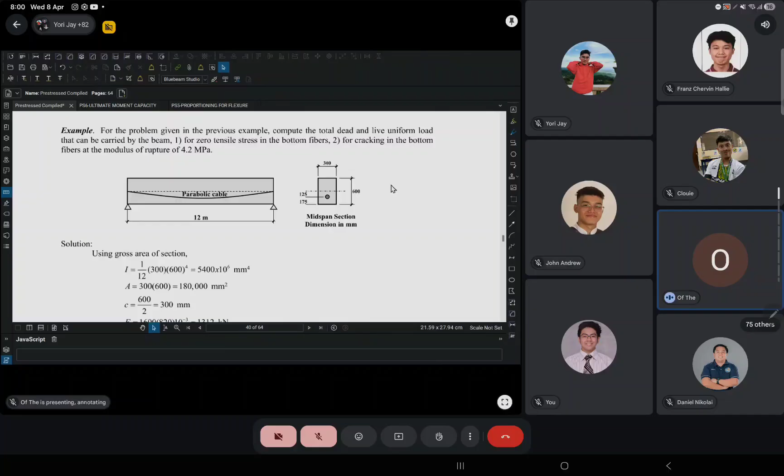So diri natay example sa kining pag-compute nato sa cracking moment. So kani murag sayon na kayo kay simply a matter of substituting into the derived nga formula for MCR.

So kung wa kay allow nga tension, then your FR will be 0. And this is used sa mga, for example, structure which are exposed to wet environment, like for example kining ice plant, or mga cold storage. So dili mo ka gusto nga na tension mo occur in order to protect the steel bars. So ang imong FR nga i-allow nimo nga tension is 0. So ang cracking moment will be this much. Kung mo allow ka gamay nga tension say 4.2 megapascal, then your cracking moment will be higher.